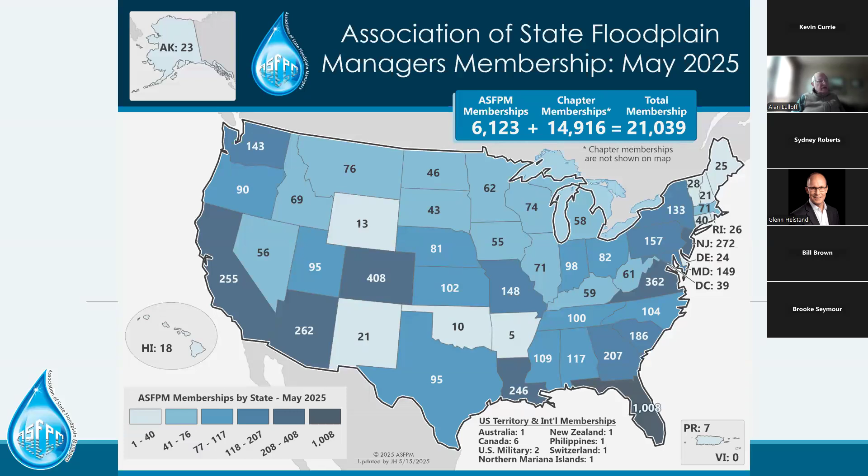So I mentioned a little bit about the ASFPM CTP subcommittee, and we're funded by FEMA to kind of support the Cooperating Technical Partner Program, one of which is the subcommittee, and we hold the routine calls with the subcommittee to discuss future webinars. And we get about 700 attendees on our webinars on average. So it's got quite a good following. We're very pleased with that.

We do outreach work associated with this project here I'm going to be talking about today, the 2D modeling outreach. And then we also conduct training via webinars and on-site training sessions.

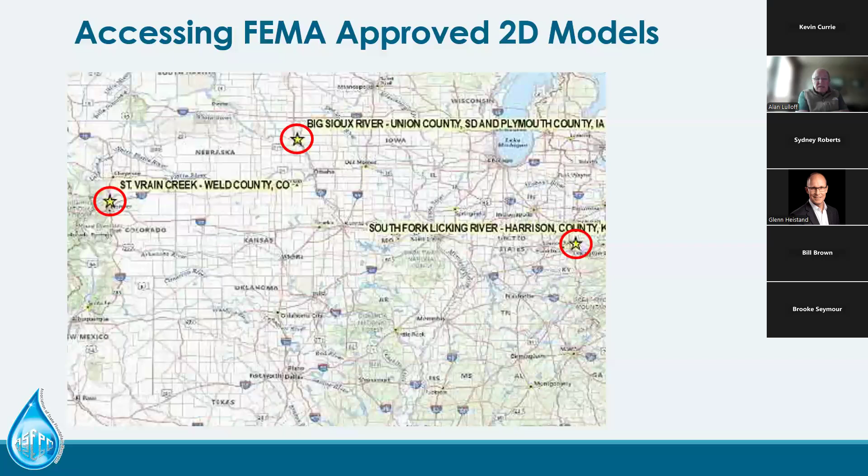And the top 5 communities, when we interviewed those communities, they basically were not aware when they first received the maps that they were developed with 2D models. And they really weren't very familiar with the 2D models. And they also weren't familiar with how their deliverables would be different than they would in a traditional 1D modeling process where the maps were prepared with 1D models.

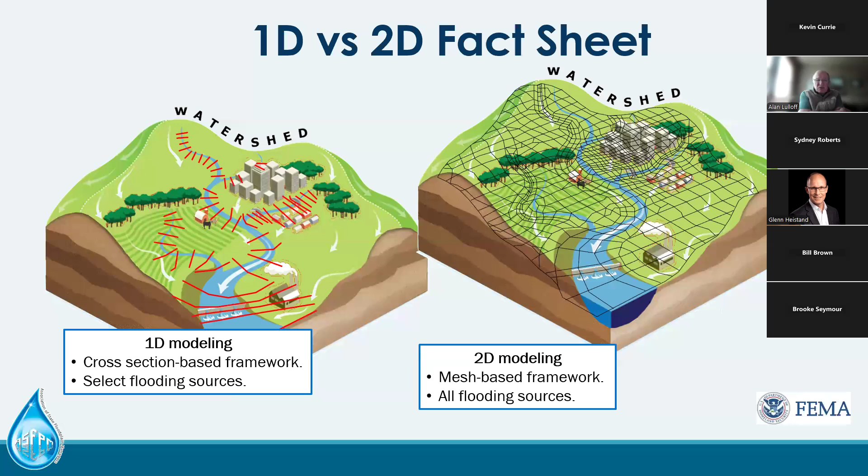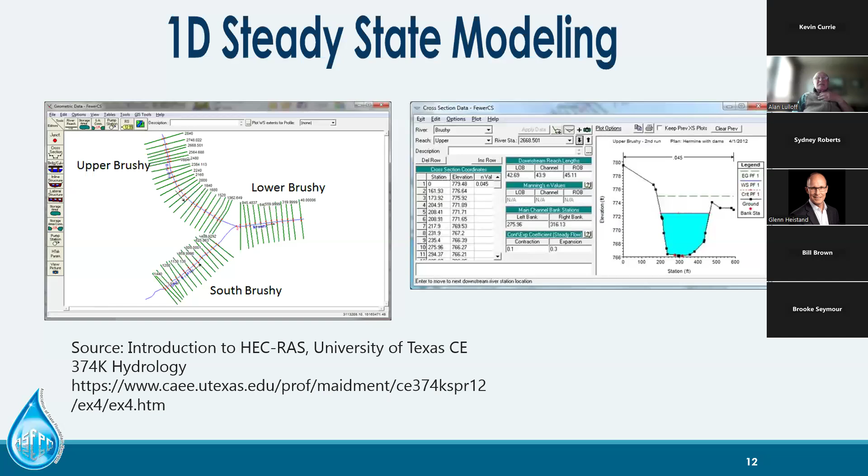Here's the 1D steady state modeling, how you see it if you were opening the U.S. Army Corps of Engineers HEC-RAS tool, and it shows some of the graphics that are available in that tool. On the left, it shows the layout with the cross sections, and on the right, you see one particular cross section and what the graphics show about that. And that's, again, one of the major differences: it shows your data at individual cross sections along the stream corridor. Another interesting thing, too, is that when you model it, you're modeling it usually from the downstream to the upstream end of your system.

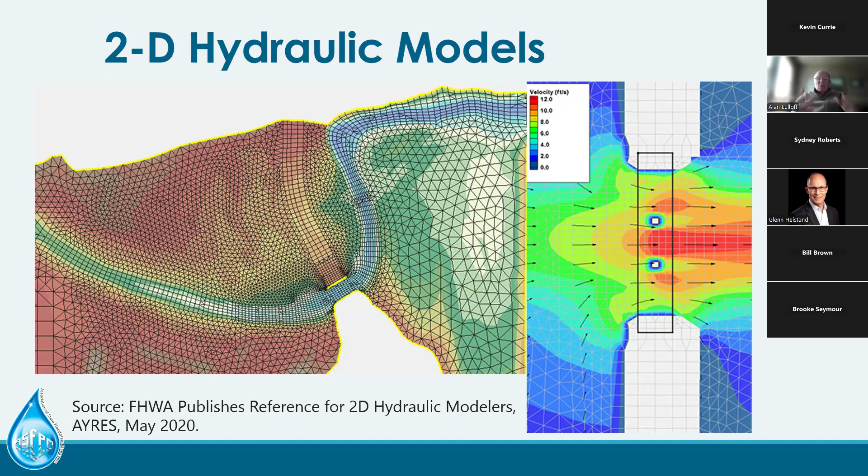In 2D hydraulic models, you can see there's a grid that's placed over the watershed, and the density of the grid varies. In rural areas, it can be much larger grid cells. In urban areas, it's a much tighter framework. And you see on the right here where it shows not only do you get flood elevations with the 2D models, but you get velocity. And here it shows the velocity of flood waters going through a bridge. And you can see how since the water's funneled, the velocity is much higher through that bridge.

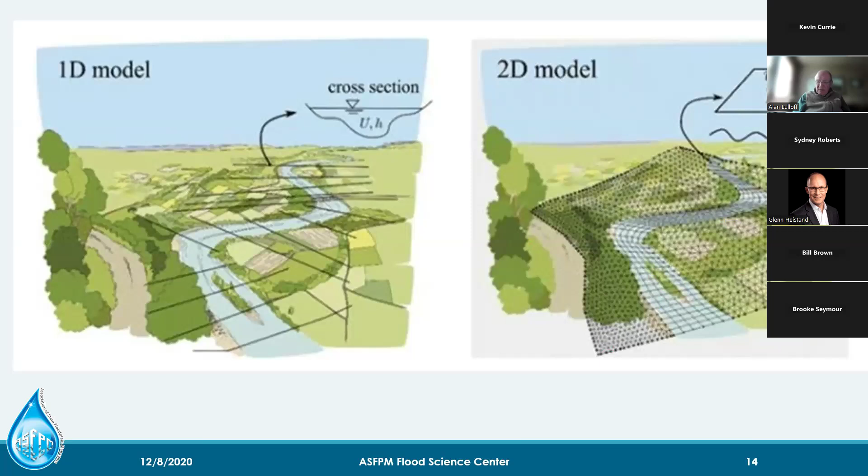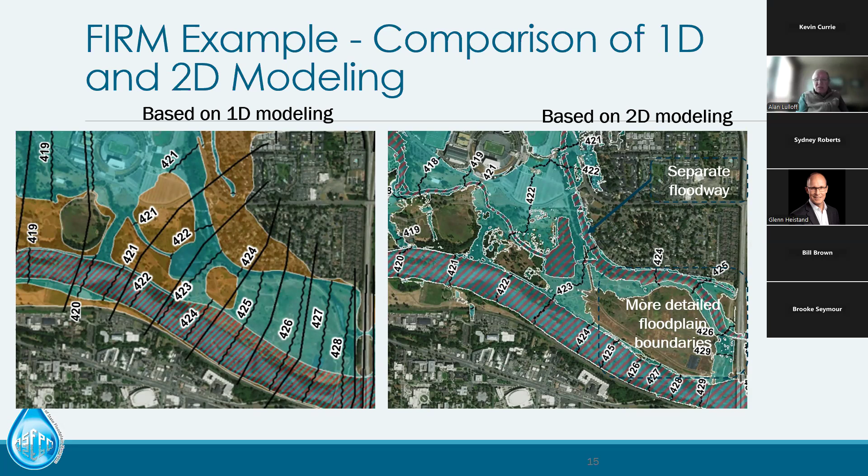And one thing I also want to mention is a little bit about base level engineering. It's often conducted actually pre-discovery, and we'll talk about the phases of the mapping process. It's conducted for entire watersheds, and it's often used for unmapped areas and Zone A areas that don't have base flood elevations. Usually it started out being done with 1D modeling, but now it's almost always with 2D modeling.

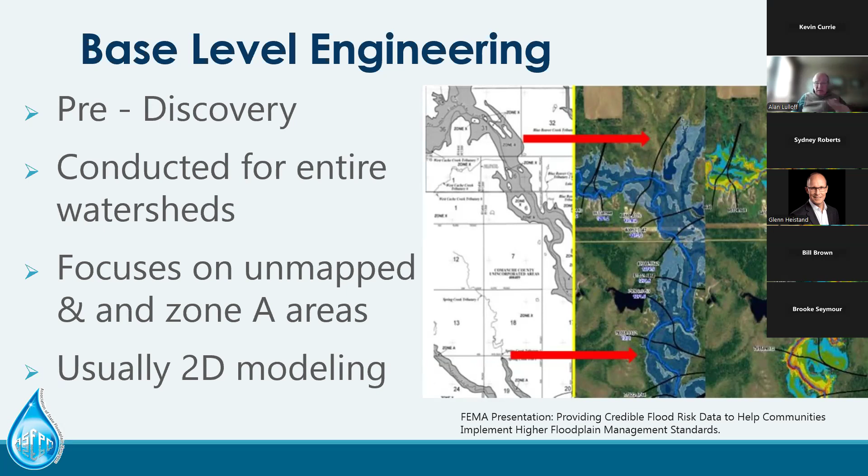Land use is an important factor because that's how they input the roughness information into a 2D model, through the land use data layer. And it's often the National Land Cover Data Set, but sometimes they can actually develop their own set of polygons that does that. But the challenge with that, it's hard to replicate that for another remodeling effort.

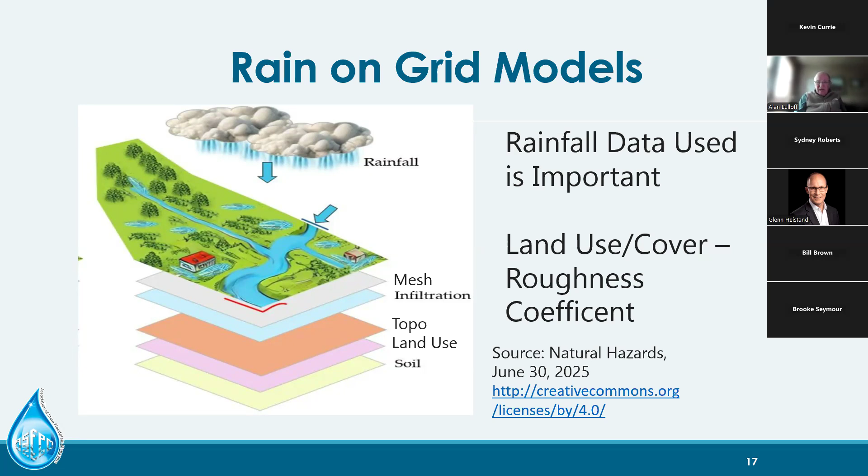Here's a rain on grid model that was developed in the Marengo River watershed in northern Wisconsin. It was a project with the Wisconsin Wetland Association and NOAA. And here it shows the water represented in the stream corridor, but you can also see the water mounds in the upper parts of the watershed. So you can kind of see where some shallower flooding might occur in upper parts of a watershed.

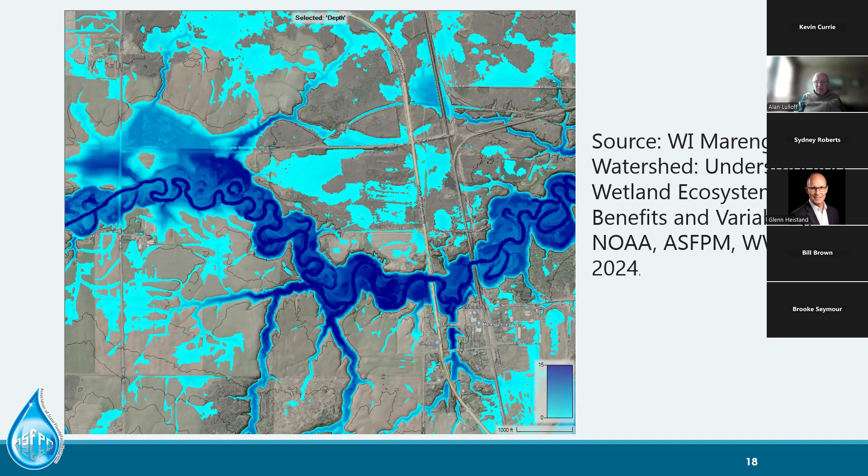If they've already developed work maps, they're in a process of putting in like new topo or even LOMRs. At that time it's much more difficult because they have to rerun those models. And so setting up those models is an expensive part of the process. And so the input is really important early in the process. So what questions to ask?

Usually it's what topographic data they're going to be using. It's now often LiDAR, but sometimes communities have more updated LiDAR that is appropriate to use. What land use data they're using, and if they're not using the National Land Cover Data Set, what land use data are they using and how did they derive those polygons? And then bridges and culverts. So often the community has more up-to-date information on bridge and culvert replacements that are really valuable in the process.

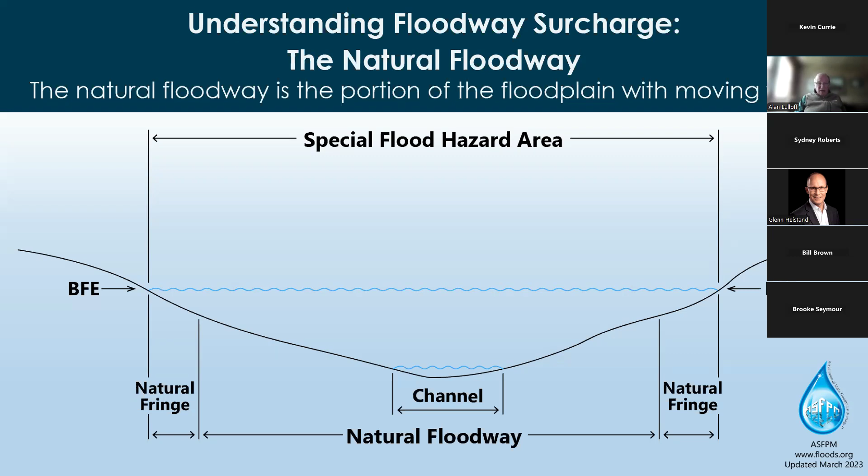And then we have a publication on how you manage development. And I'm going to give a little spiel here on floodways. That's one topic that I focused on in my career with ASFPM. Here you have the special flood hazard area, and you've got the floodway, and then you can apply a surcharge. FEMA has something in their regulations that basically allows you to use up to a 1 foot surcharge, which means as the fringe gets developed, it actually can cause the flood elevations to increase by up to a foot.

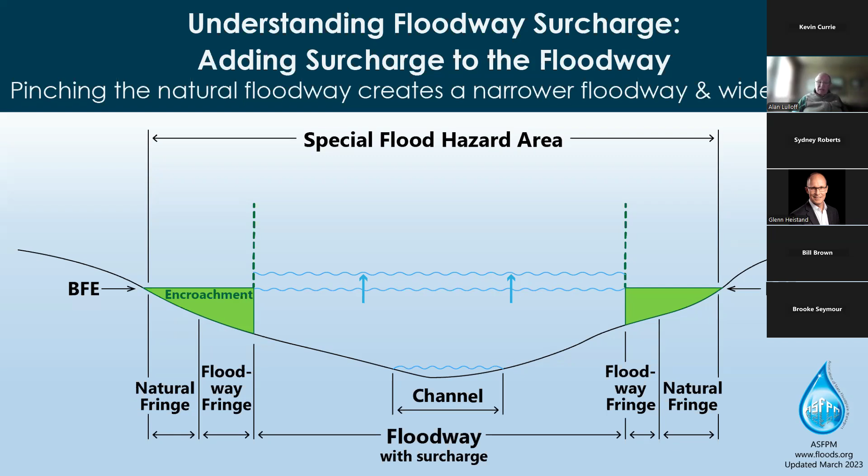And when you think of that initially, it's kind of strange that they would allow increased flooding, but the view was that they could at least limit any increases to a foot. Prior to that, you'd have some development that could cause more than a foot of increase, and so they set that 1 foot standard because that would at least cap those increases.

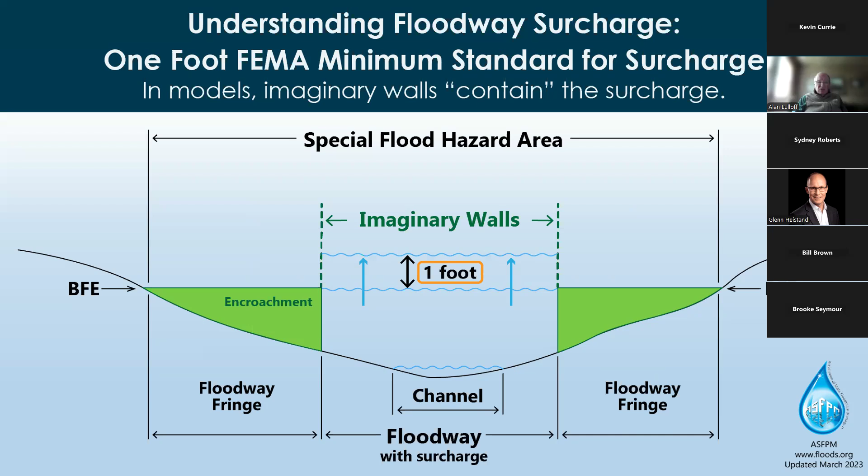And this shows kind of how they did it. In the model, you place some imaginary walls that are quote unquote frictionless walls. And you can raise that up to a foot and keep pinching in your model until that 1 foot surcharge is hit. The challenge is that surcharge doesn't stay in the floodway. It actually goes out into the flood fringe area and actually beyond the special flood hazard area.

And we did find a report that was produced in 1978 by James Goddard that talked about the origin and how this was established. James Goddard, by the way, is who the Goddard White Award is named after, along with Gilbert White. One of the reasons they developed that early on is that James Goddard was from the Tennessee Valley Authority. In the Tennessee Valley, they had very steep side slopes, so if they mapped the whole floodplain as floodway, there wouldn't be many areas to develop. So that's when they came up with this 1 foot surcharge concept.

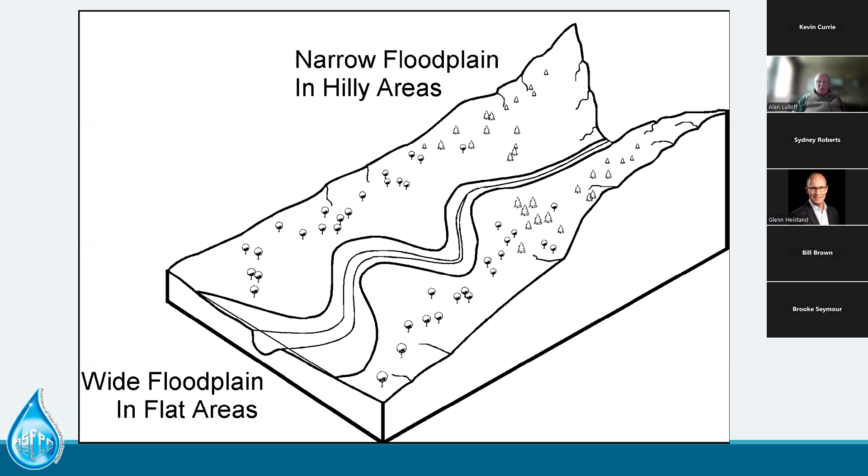According to Goddard, you can't come up with a flood elevation better than plus or minus a foot. So that's how they set that 1 foot. But in actuality, that's kind of mixing absolute impacts versus relative impacts, which, anyway, that's how they came up with the 1 foot. And according to Goddard, it was intended to be a minimum criteria, and in urbanizing areas and where there's existing development, a much smaller rise would be appropriate.

So some states said, yeah, we agree. We're not going to go with 1 foot. We're going to go with something much less. And so Wisconsin, Michigan, Indiana, and Illinois came up with a concept of a measurable amount, and that was a tenth of a foot. And Illinois actually included a velocity component, so you couldn't increase velocity by more than 10%.

When I was with the state of Wisconsin, I was used to this kind of a hundredth of a foot surcharge, and I was really surprised to learn that in New Jersey they have a 0.2 of a foot surcharge requirement. They also have a higher standard for the flows that are used in their modeling process. And then Minnesota, Montana, and Colorado came up with a 0.5 foot surcharge as kind of a middle ground.

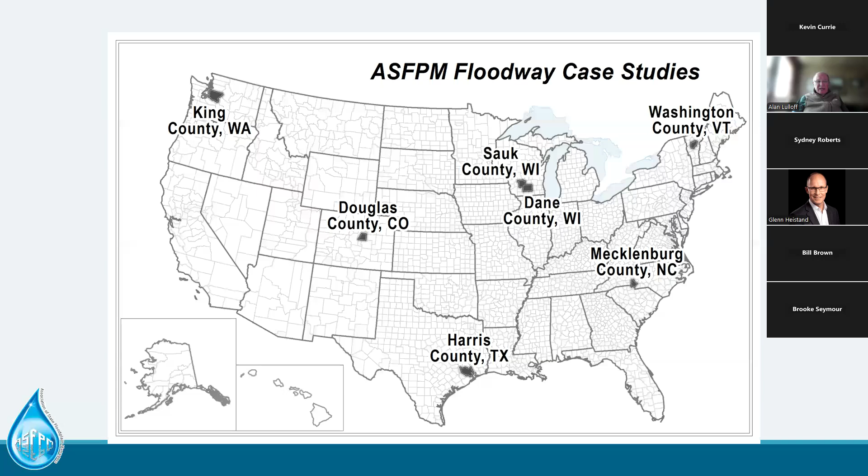Again, I came from Wisconsin. It's like, how big an impact is a 1 foot surcharge floodway? At least in the one-dimensional world, we looked at some case studies across the country. We had 8 areas we looked at. We hired an engineer to do an analysis and looked at these.

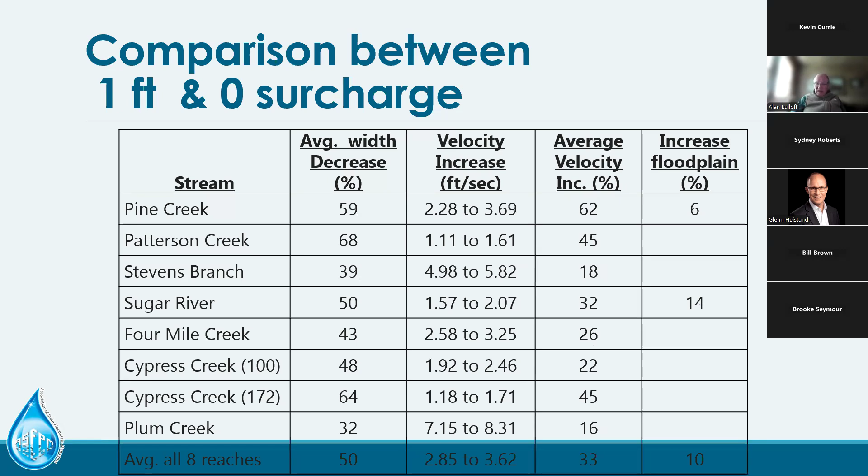The width decrease from a natural floodway varied from anywhere from 32% up to 68%. So from 1/3 to 2/3 was our results. On average, it turned out to be a 50% decrease in the width of the natural floodway by using the surcharge. You can see also a velocity increase, and it increased the size of the floodplain by 10%.

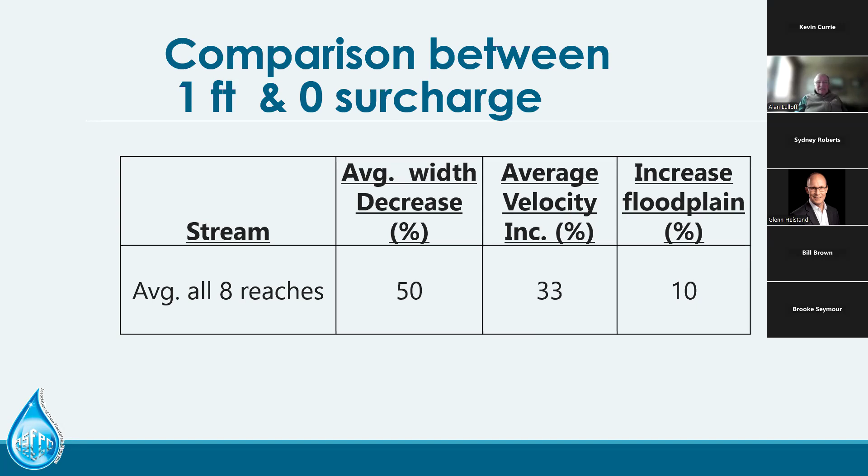In 2D modeling, 1 foot surcharge floodways are more accurate because it accounts for loss of storage. They're typically wider, and there's surcharge challenges of meeting that 1 foot surcharge limit, even if you make it wider. And there's no rise challenges, and I'll show you a little bit about that.

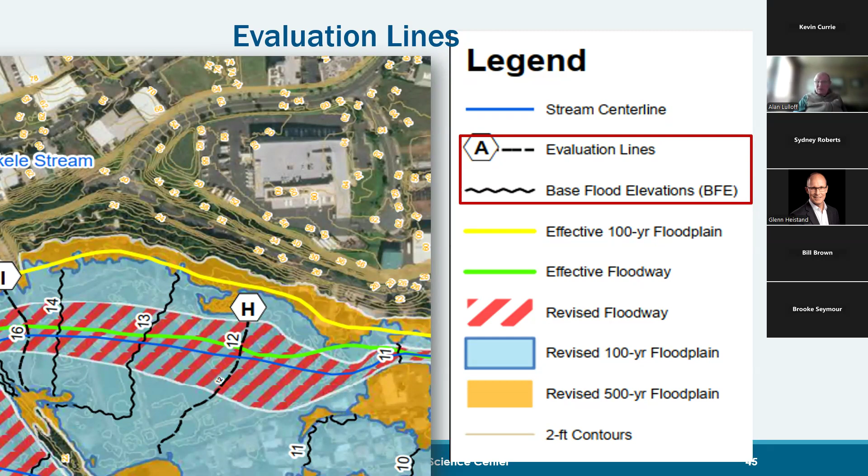Here's a zoom in of that, where the evaluation line is a dashed line and base flood elevations are a squiggly line. Here it shows it lettered, like it does with a cross section, but in many cases they use just asterisks instead of letters, or sometimes numbers, to show they're different than cross sections.

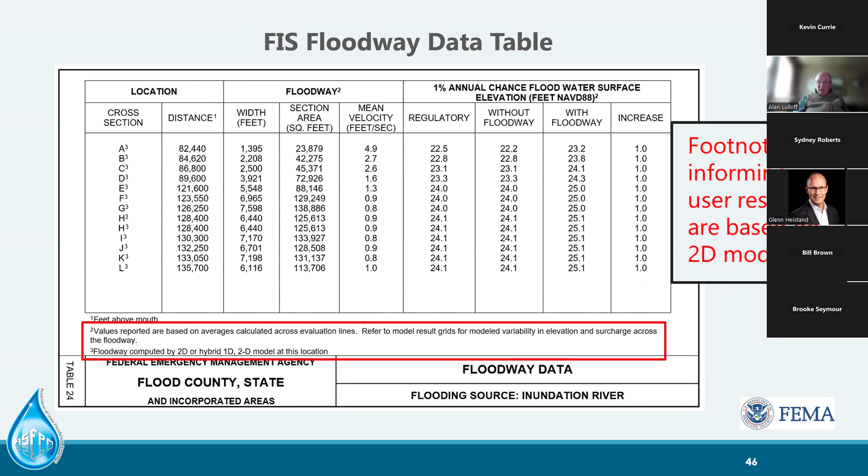And then they put footnotes in the floodway data table, because the floodway data table doesn't handle grid results very well. Here's a footnote. You can't read that very well, so I'm zooming in. It says, values reported are based on averages calculated across the evaluation lines. And that's what most communities weren't aware of until after they had the maps already. And it says here, the floodway is computed by a 2D or hybrid 1D/2D model.

So the challenge with 2D for communities is it's a grid versus a vector data process. When you look at the flood insurance study, there are results along these evaluation lines, where in actuality there's a grid that shows the elevations across that whole watershed. They're large, often 20 gigabytes or greater. No rise analyses are a challenge, like I mentioned, and there's no cross sections.

Communities used to find ways to look at a flood profile and look between cross sections and come up with elevations for structures between cross sections. Well, in a 2D model, there are no cross sections. If you have the ability, you can look at the grid and get the results, and that's quite accurate, but communities often don't have the capability for doing that.

Often it's unsteady flow, especially if it's a rain-on-grid, and the runtime can be very long, unless you've got a very good processor, since you hopefully have the model already on your computer.

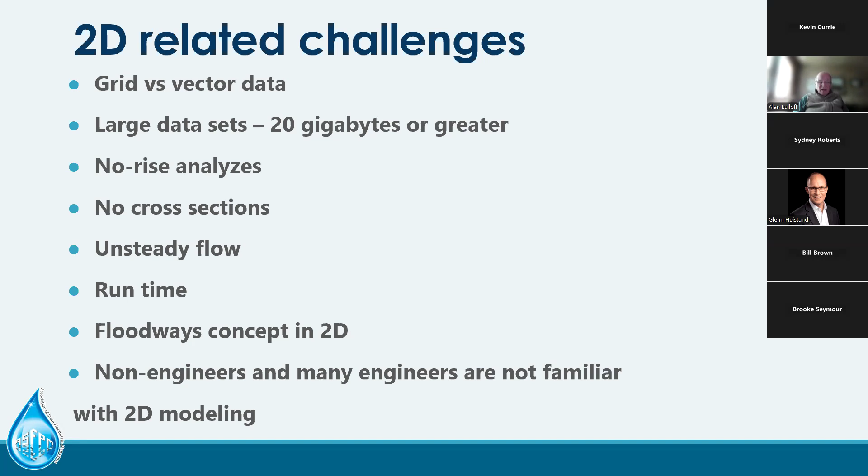Challenges for the community is getting access and downloading the model. If it's a download, usually it's best to get it on a separate hard disk. Storing digital copies, again, large files. How to maintain the modeling, and as you know, communities, as somebody comes in with a development proposal and they want to do a LOMR, how do you maintain that? And then again, there's no cross sections and no flood profile. So in some cases, they were told to kind of straight line it between evaluation lines, and if you have a structure between evaluation lines, you can come up with an elevation that way.

But often, if you've got slopes and abrupt changes in elevation between those evaluation lines, that can be quite inaccurate. And if evaluation lines are used for a no rise, they can only be used if no insurable structures are impacted. So the community's got to make sure that if somebody's doing a no rise and they're signing off on it, that engineer that did that no rise made sure that there were no insurable structures that were impacted. If you don't do that, that kind of does open the community for liability issues.

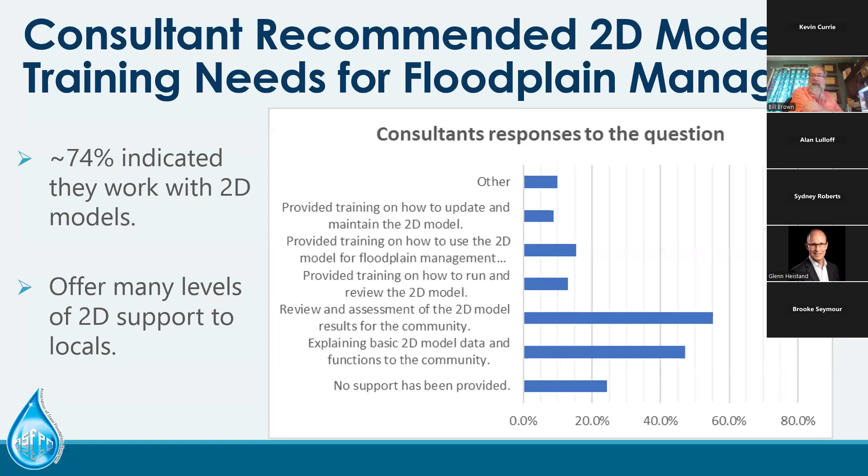Now, this is a quick survey, so not a lot of detail involved, but at least it gave us a pretty good view of this. So from a 2D perspective, the flash survey provided a lot of good, consistent feedback, and it was obvious from all the responses that training is needed, and it provided insight as to what kinds of training were necessary.

For the 2D training being developed, the first phase of our endeavor was this needs assessment, that survey, but it was also to search for any existing trainings. As I indicated before, we didn't find a whole lot of information for people on how to actually look at the data. Almost everything is how to build or run the model. So the training that we're developing will not be training for how to create a 2D model or run the 2D model.

It will focus on how to use the data generated by a 2D model to do floodplain management functions. If somebody wants to know how to run the model, there are those courses out there, and there are training opportunities for people to learn how to run or create a 2D model. This is more focused for those individuals who don't have that function, but they need to know how to use the data, or at least review it and get a basic understanding.

So one of the first things we did also was to establish an advisory committee comprised of consultants, state staff, and local floodplain managers. It's a mix of technical and non-technical folks, and based upon the feedback and the advisory committee's support, the training program outline has been developed. So with that, the training program outline is essentially this.

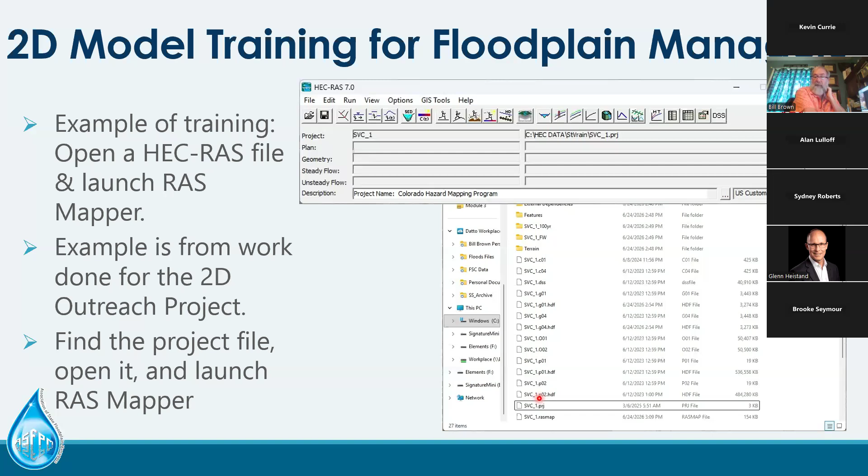So as an example, you'll notice on the screen, oops, gotta get the laser pointer. This is the HEC-RAS interface. I've obviously got a file loaded. I saw somebody talking about St. Vrain, Alan had mentioned earlier. This is actually data from that model. We're going to show somebody how to find where the project file is and open it up. And then once they get it open, how do you look on the left side of the screen? What are the features? What's in there?

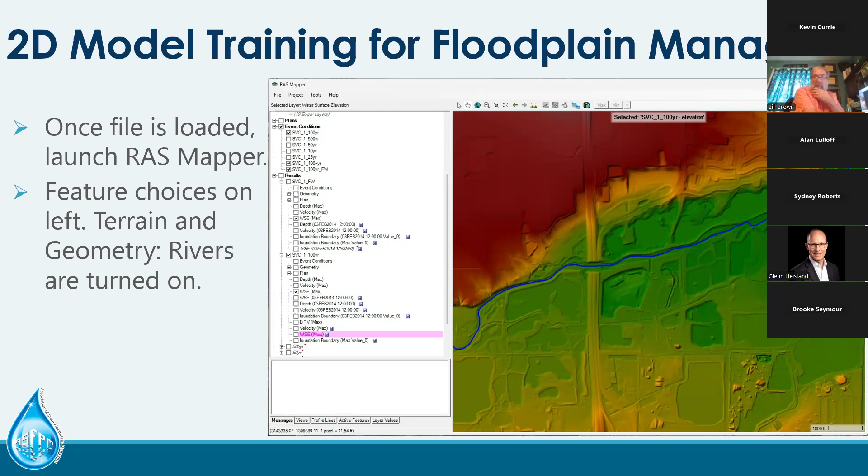Right now, this is obviously the St. Vrain Creek in Colorado. But we'll explain the features. On this one right now, the terrain data is turned on and the river is turned on. But if you're a local floodplain manager, the first thing you typically want to know is, where's the floodplain? So this explains how you click on the features to find the 100-year flood boundaries, turn it on, and go from there.

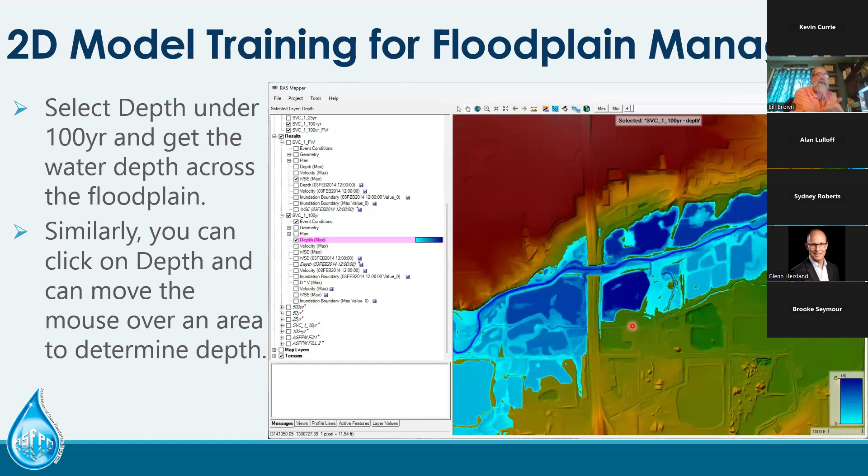So these are the type of training that we'll go through to explain, a lot slower than what I've talked about, but it'll explain to people how they can do this and find this information so they can use it for their day-to-day floodplain management, permit review, identifying a BFE, that type of information.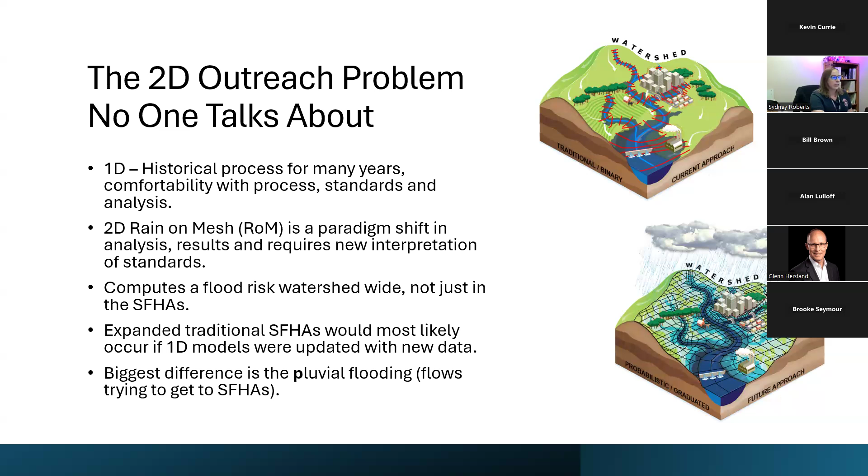So I just want to highlight what actually makes 2D different, because that really is the core foundation of every outreach and communication challenge that follows. I throw this graphic in here because it's really worth pausing on. This is how we explain the transition to our communities, and quite frankly, to really anyone who asks, well, why did you move away from 1D?

Looking at the left side, in a 1D model the user is making a bunch of assumptions about nearly every hydraulic model variable: your flow direction, your flow paths, channel roughness, etc. But then on the right side, 2D computes those variables for you. So the model ends up solving those at nearly every element across the entire watershed. Channel roughness is still assumed, but it's assigned at each computational element rather than being applied uniformly between those cross sections. And that really is a meaningful distinction.

And then there's the momentum. 1D doesn't account for it, but 2D does. And when you're talking about water moving across a very complex floodplain, where maybe there's overbank flows, ponding, water routing around structures, that momentum really matters. And that's not a minor technical footnote, which is why the results look very different. And that's why we have to help communities understand before they ever see a map in front of them.

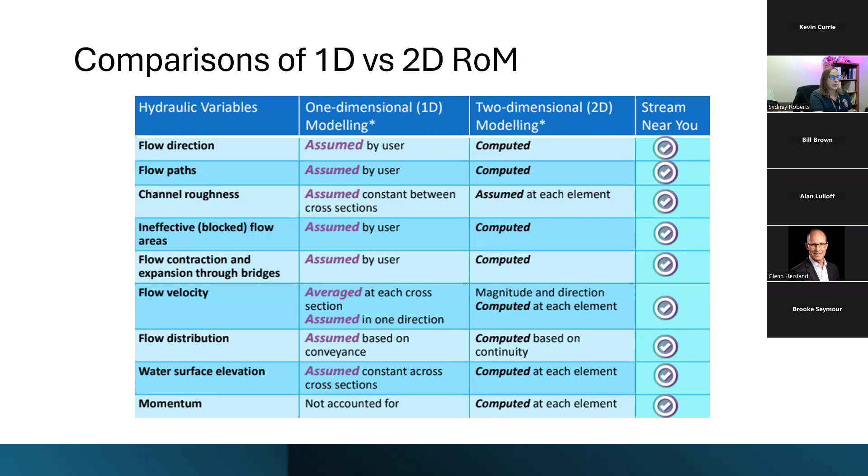So how do we handle that? Really, our core principle is pretty simple. Engagement starts at project initiation, not at flood risk review, not even at your CCO meeting. It's day one, because by the time any product arrives in front of those community officials, they've already had multiple touch points and they've already heard all the buzzwords. So when they see how that model works at a higher level, none of the data or maps that come to them is a surprise. It's really just confirmation of something that they already have context for.

We also treat staff turnover as a constant and not an exception. Every phase of the project gets delivered as if it's their first exposure, because often it is. A floodplain administrator who was with you at the initial kickoff meeting isn't always necessarily going to be with you when the preliminary products are issued. And that's really just the reality of local government. So we essentially build and integrate our trainings into each and every community meeting. And the ultimate goal is to have better informed and prepared communities, not just notified ones.

So when we sit down with a community and explain why we moved to 2D, we like to focus on three things. First being the terrain representation. These models are LiDAR driven, so they have a much better description of the landscape at a much higher level of detail that makes the results visually believable to a non-technical audience. Second, where the computations happen. In 1D, you're computing at those cross sections along the conveyance, and everything in between those cross sections is interpolated, but in 2D, you're computing at all of those mesh cells across the entire watershed, which is a completely different resolution of risk.

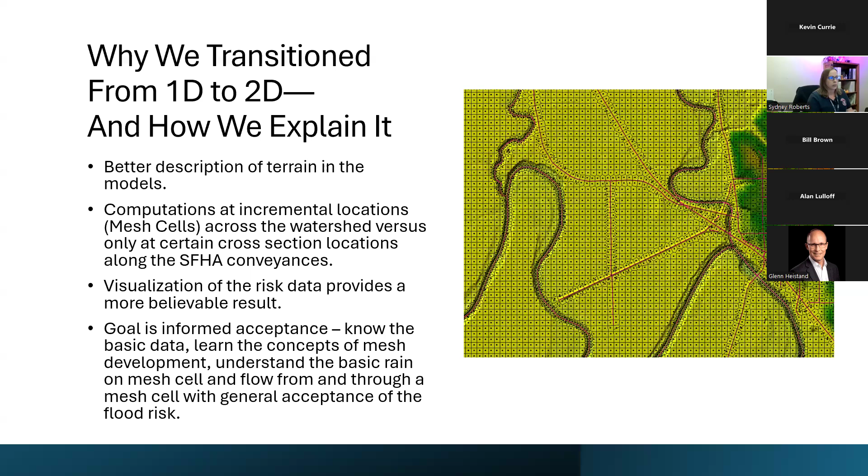And then third, and this is the framing that we use with our communities, the goal isn't to overwhelm them with modeling talk. The goal is essentially informed acceptance. We want them to understand enough about how the mesh works, how the rain falls on it, and how the water moves through it, that when they see their flood risk results for the first time, they trust it. And that's really the bar that we're aiming for.

Part of that trust building is being transparent about what all goes into the model. We never skip the inputs conversation whenever we give our presentations. We explain that 2D provides analysis throughout the SFHA, and it captures the rain falling across the entire watershed that's trying to get to the SFHA. And that's really the bridge from traditional floodplain thinking to watershed-wide risk thinking.

The inputs we walk communities through include the LiDAR, rainfall, land use, break lines, hydro connectors, and building footprints that get raised as 3D obstructions in our models to allow the rain to go around them. And that last one tends to land pretty well with our officials because it's intuitive. So why does this matter for our outreach? Because when a community later looks at their draft data and sees the water routed around those structures or pooling in a low spot, they understand why this is happening. We've given them the vocabulary, and we're making sure that our supplemental products are usable rather than just being another deliverable.

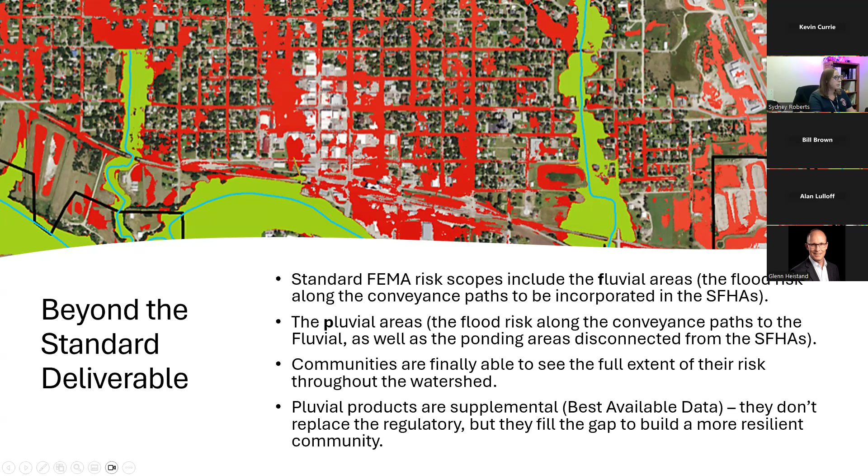So our position at MOSEMA is that if you're running a 2D study, supplemental products should be the minimum responsible delivery. So I'm talking about your water surface elevation rasters, your depth rasters, DEMs, building footprints, and your freeboard grids. These all exist as outputs of the modeling process, whether a community knows how to ask for them or not, and our job is just to bring them to the surface.

The goal is to put the flood risk data in front of any user with an internet connection, no requirements beyond their willingness just to point and click. They shouldn't need any GIS software, no engineering background, no consultant required. Everyone should have access to their flood risk, from the floodplain administrator all the way down to the residents.

And then for other CTPs that may be on this call, if your 2D scope isn't producing and delivering some of these products, I definitely encourage y'all to start having this conversation amongst yourselves and even with your regions, because the data exists, but really the question is, is it reaching the right people?

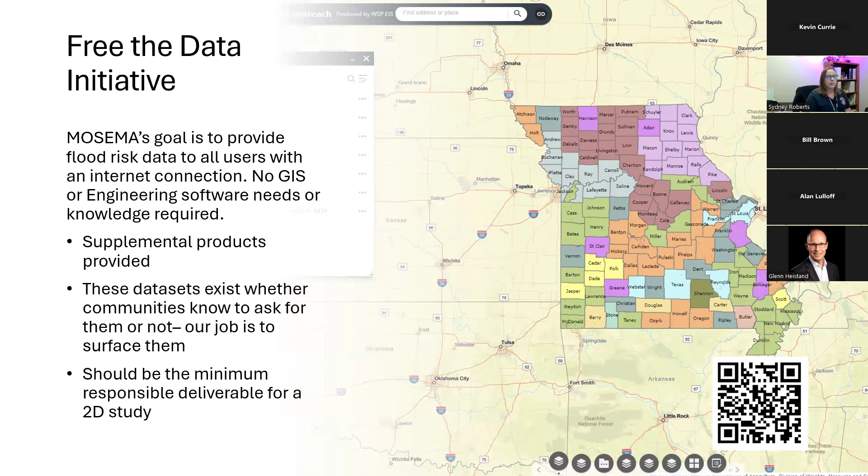Okay, so what does that actually look like for us? Here in Missouri, we've built two separate public-facing web portals. We have a project site that houses all of our working draft data, and then we'll have an effective site that's going to store all the effective data. Again, no license and no expertise is going to be required for either one.

So our project site is live right now, and it houses all the project data, and this includes our project files, so any past meeting recordings, PowerPoints, sign-in sheets, agendas, anything like that. SFHAs, we also have a changes since last FIRM layer that essentially provides communities with a comparison of the draft against the effective. Those hydro connectors, break lines, eval lines, building footprints, rasters, all of which are available 24/7.

The effective site is where all of our data is eventually going to migrate to at LFD, when we have a high level of confidence that the data is not going to change. So this site will contain all the final data sets, including the additional supplemental data sets, such as our depth rasters and our freeboard grids. The site is fully built and functional, but it's not yet in full launch.

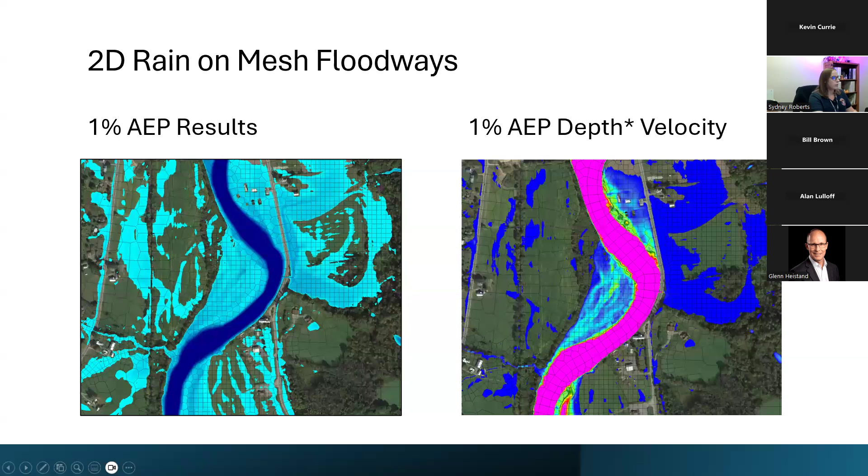Okay, so now I'm gonna go over the policy gap that we're all facing. Profiles in the FIS are optional for 2D studies. We're not doing them here in Missouri. Evaluation lines are essentially going to replace our cross sections as the regulatory data product.

And this is a critical distinction because in 1D, regulatory data is the product of computations at cross sections, versus in 2D, the regulatory data is going to be a product of creating a raster of computations at every mesh cell, and the evaluation lines are essentially the water surface elevation contours of that raster. So those evaluation lines are going to carry every same regulatory precedence of a cross section.

The issue with that is that FEMA guidelines and standards language hasn't fully caught up with this new reality. So we are working on getting NFIP training materials modified to accommodate the raster-based floodplain management, but there's still going to be gaps, and we're going to be operating in those gaps every day.

So our advice is just to document clearly and consistently so that when the guidance eventually does catch up with us, you want to have a paper trail with you that shows what your process was, so you have that defensible argument.

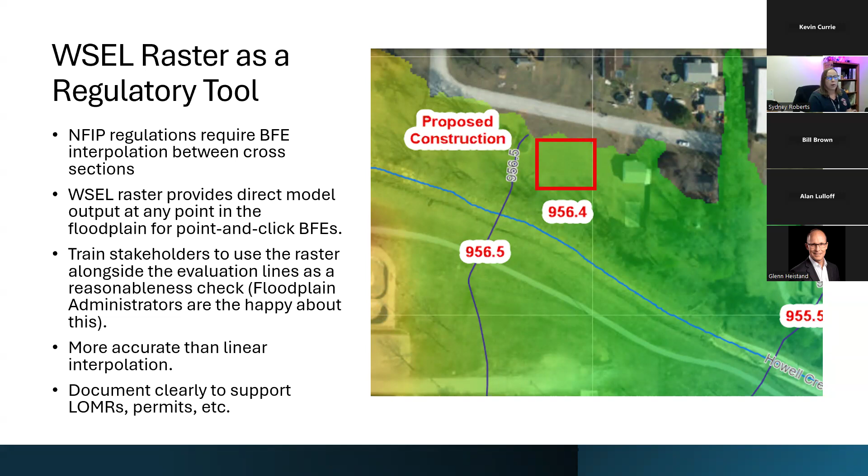So, speaking on no-rise certifications, this is a common question that we get from our communities and our engineers who are looking on working with these products more. And so this is just kind of an overview of how we handle it. Evaluation lines are created at 0.1 foot increments and filtered to create a regulatory raster that sits within 0.1 to 0.2 feet of the model raster. That filtered data set is your manageable regulatory surface.

At transportation crossings, this is where it gets really important, is that most structures create that drawdown through the impacted reach. So our regulatory evaluation line data set captures that first evaluation line upstream and that first evaluation line downstream of the structure, each one extending across the full width of the floodplain. The regulatory raster between those two lines is a straight line interpolation.

What that does is place the model results below the regulatory surface through that reach, and that gap between the regulatory surface and that model output is essentially going to be your window of opportunity. Modifications can be made and still produce model results that don't exceed the regulatory surface, meaning no increase in regulatory value. Hence, that's giving our Department of Transportation a fighting chance at obtaining a no-rise.

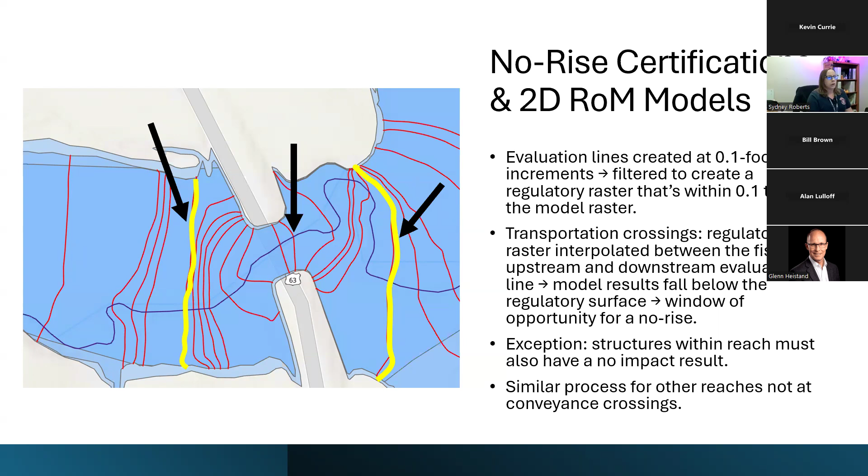So now touching on some lessons learned, what's actually been working for us in Missouri is, again, that early and often engagement is really the single biggest factor for us. The communities that came into their flood risk review meetings already understanding that 2D paradigm shift have had different conversations versus the communities that have seen it for the first time. It's really a night and day difference in the quality of back and forth dialogue and acceptance.

Integrated trainings, just embedding that education into every community touch point versus scheduling a standalone training meant that the learning has compounded across the project lifecycle, so that by the time the preliminary products did roll out, we weren't introducing any new products or anything that they haven't already heard, but rather, we've just been reinforcing them.

And the supplemental products themselves, just being able to hand a community a depth grid and a freeboard raster alongside their regulatory FIRM changes the conversation from compliance to planning. And that really is 100% worth all the effort. However, I will say what's hurt us the most is the sequencing. Like I mentioned earlier, we've built those two forward-facing web portals, more specifically, the effective portal that we created. This was developed after the data was already produced and delivered.

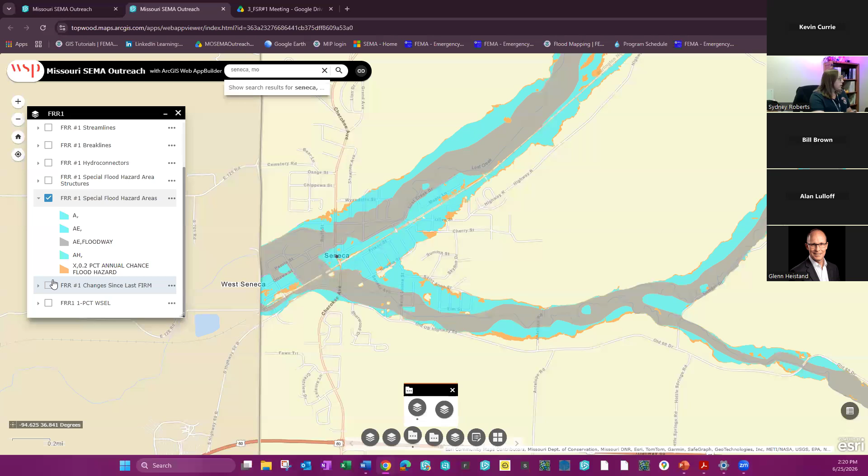Also, what I mentioned earlier is how we have that changes since last FIRM. This will show you the comparison between that draft data and what's currently effective on their maps today. We also have that broken down. So green is basically a decrease, red is an increase, and then yellow is no change. It's a little slow to pull up, but maybe when I start turning some other things, it'll populate.

Well, while that's going, up here at the chain link symbol next to the search bar, we do have county folders. Whenever you click on that link, it'll take you to all of our county's project documentation. Again, just focusing on Newton County, where Seneca, Missouri is based. We have our meeting agendas, recordings, the actual PDF, anything associated with the project throughout the duration of the project is going to be posted on the site.

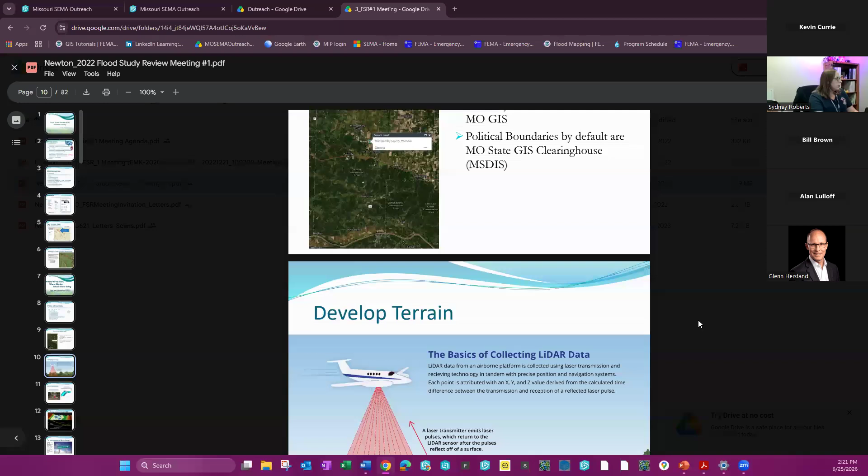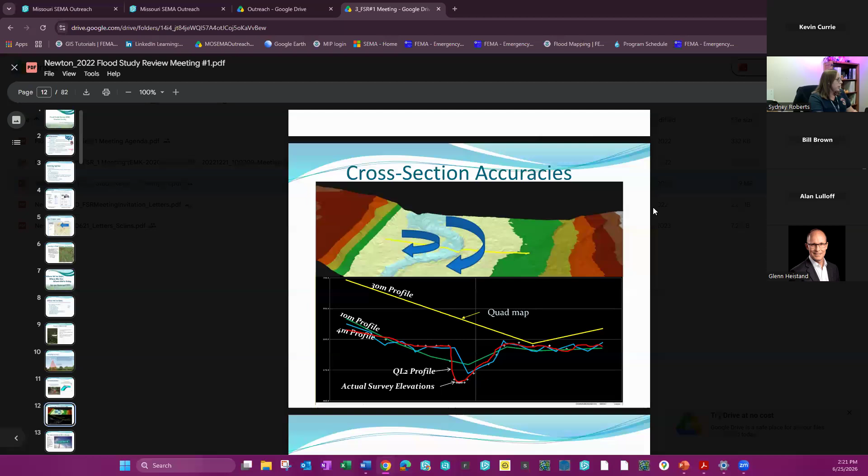This also gives an overview of kind of how I mentioned that we train our communities. So talking about that LiDAR, talking about where we acquire the base map, develop the terrain, the differences in the cross sections, how much more accurate it is as compared to the old quad maps or the 10-meter profiles. Then there's that same screen grab that I included in my PowerPoint of what we show the communities on the differences between the 1D and the 2D and why we made the switch.

Doesn't look like it wants to load for me today, so this might be a pretty short demo if it's not going to work. And likewise, we also have preliminary down here. The same setup as our data development. It's going to have very similar layers over here. They're going to have the same evaluation lines, streamlines. They'll also have the changes since last FIRM.

If communities also want to share their feedback with us, they can do so directly by leaving a comment. So that second from the right button, they can just click on that. If it doesn't automatically pull up, it's usually because we don't have comments turned on in the support data window. But when you're able to select comments and turn those on, we usually have a series of dots that show up.

Depending on the phase, each one will be associated with a color. So, red for your flood risk review, yellow for your discovery, blue for that preliminary CCO, modeling methods and extents. And it really is as simple as just click the dot, and anywhere on the map that they want to leave a comment with us, they certainly can. We typically treat these dots as basically a task list for us to review once we're through that comment period.